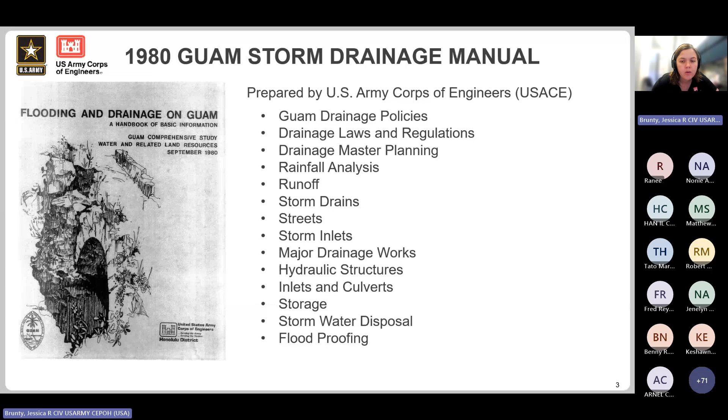The governor of Guam recognized that the 1980 manual was in need of updates based on significant rates of development and advances in technology, rendering better and optimal designs. So in 2005, the CNMI and Guam Stormwater Management Criteria was finalized after public meetings and a comment period. This set of criteria provides a framework for standards pertaining to comprehensive management of stormwater. These criteria provide proposed standards to augment groundwater recharge, achieve water quality protection, prevent accelerated stream channel erosion, reduce flooding threats, and preserve sensitive habitats.

Sticking with the timeline here, around the same time, Dr. Lander from the University of Guam published Technical Report Number 103, Rainfall Climatology for Saipan, Distribution, Return Periods, El Nino. In this report, return period calculations for Guam's peak annual 24-hour rainfall yields a mixed distribution with typhoons.

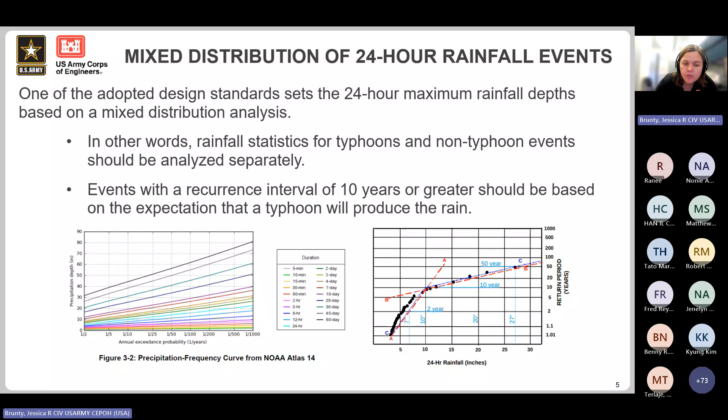Executive Order 2005-35 basically said that DPW should use the new criteria, but at the time, private development didn't have to - they could still use the old standards.

Then in 2006, the CNMI and Guam Stormwater Management Manual was completed, prepared by Horsley Witten Group. This manual was based on the CNMI Division of Environmental Quality and the Guam Environmental Protection Agency identifying the need for a new guidance manual for developing and implementing stormwater and erosion control plans that adequately address non-point source pollution through the use of currently accepted best management practices. So they came up with a new manual.

It was intended to replace previous reference manuals. They also came out with a second volume - Volume 1 provided the general overview, and Volume 2 contained the technical information needed to actually design a landscape. These are reference materials that we also used in the development of the spreadsheet.

Also worth mentioning that in 2010, there was the Island Stormwater Practice Design Specifications. And in 2009, there was another executive order that said application of the criteria was stayed for 2 years.

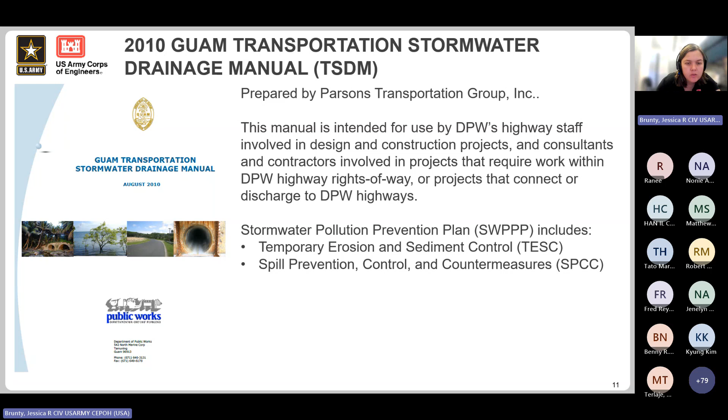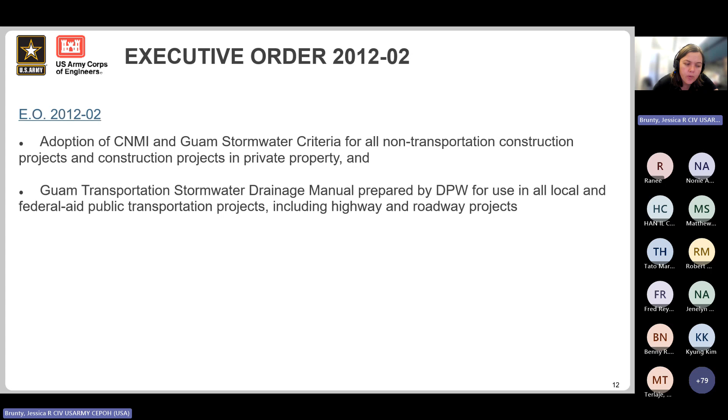They came out with the Transportation Stormwater Drainage Manual in 2010, and this manual was intended for use by DPW's highway staff. So a couple different manuals, different uses, but this latest executive order from 2012 says the CNMI and Guam stormwater criteria for all non-transportation construction projects and construction projects on private property should use these previous standards that were developed, but that all transportation projects would use the transportation manual. So there's a little bit of a difference there, and the spreadsheet was specifically developed for the non-transportation projects.

The president concurred the need for just additional clarity in and updates to the manual. So that's where we're at.

Mostly, I have additional slides on the background as questions come up, but I will kick it to Tyler now so we can jump into the spreadsheet.

Okay, thanks Jessica. I'll give a second in case there's any questions on the background of what we're talking about. And then while we wait, I'll go ahead and share my screen.

So I was going back and forth on how I wanted to do this training. I think the best way is actually sitting here and inputting numbers and talking through each tab. You all should have received a zip folder that had all of these attachments here that you see on the screen.

I'll quickly go over these so you have an idea of what we're all talking about. So this presentation - I actually have it on my side screen - is a really helpful instruction manual that I put together on top of the training. So if you came back and had questions, it really gives a lot of information on how to do this spreadsheet. I'd recommend having it on the side while you watch, just to follow along as we move forward.

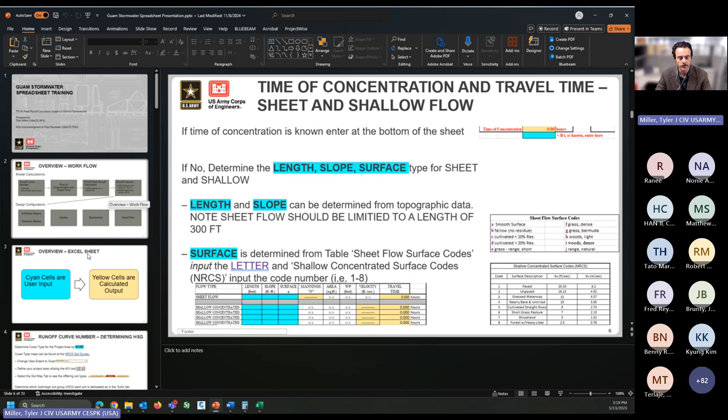And so that's the PowerPoint, and like I said, it's kind of like an instruction manual. The Word doc is an actual example that was taken from the CNMI manual that Jessica just briefed us on. It's examples from projects, and they went through the entirety of the example and inputted everything into this Excel sheet. And that product is this Guam example for part A.

So that is a filled out spreadsheet with all the numbers, and this is heavily in depth - it's like 55 pages long, and it goes really in depth on not only what you're inputting, but also how the outputs are calculated. So if you're super curious on how formulas were made, this is where you go.

Then these are the two manuals that we're basing a lot of things off of, the CNMI volumes 1 and 2, and then there's also the TR55, which is a graphical method we'll use on the third tab. So that's all the things that should have been included as attachments. And from there, I think it's best we just get started and dive right into how the Excel sheet works.

Big overview is you have a ton of tabs down at the bottom. The way the Excel sheet works is you work left to right, starting at the far left and working your way right.

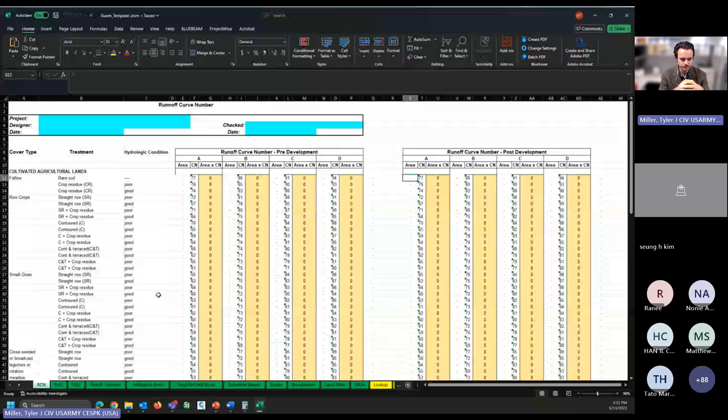Now you have to select what sort of features are planned or you're thinking about for your project. They have an infiltration basin, detention basin, swales, bioretention, and sand filter. Those are the options, and they're all based off of the CNMI manual on how to design them. For background, I'm a designer, so the right side makes more sense to me, and the left side's a little shaky, but nonetheless, we'll figure this out together.

The teal on the Excel sheet is your actual inputs - this is where the Excel sheet is asking for you to put something in. The yellow is already generated output, so you don't have to do anything there. These are things that the formulas in the background are calculating, and if you're curious, you can just click on them and kind of get an understanding, just from general Excel world.

The first thing we're looking at is trying to create the runoff curve number, which is basically how quickly water runs off of the surface. The first thing you have to determine is the cover type of your project area, and this can be done generally by Google Earth or whatnot.

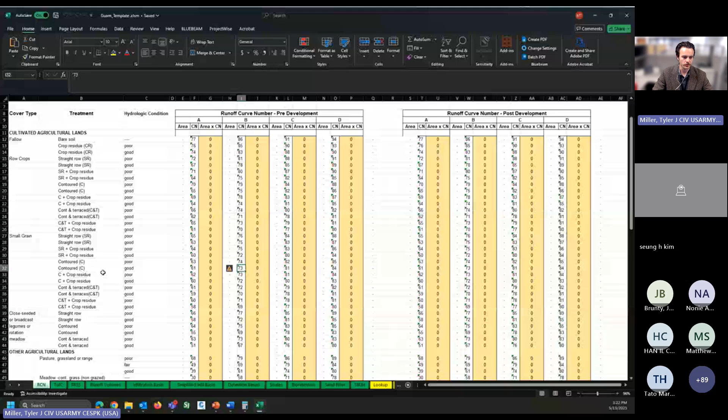For the sake of what we're doing here, we have different cultivated agricultural lands, woods, meadows, fully developed areas, parking lots, residential districts. Something that's super useful is a lot of these, if you hover over them, tell you what's poor versus good. So there's a lot that can be utilized here.

So this is part one, figuring out what your cover types are. Part two is determining which of these columns you're going to be in: A, B, C, and D - this is pre-development and this is post-development. The A, B, C, D is based off of the soils.

At the far right of your Excel sheet, you'll come to the soils tab and you'll see soil name and then the HSG group. The way you figure out what your soil group is, you actually go to this website, the Web Soil Survey from USDA, which, in case you're wondering, the link is within the PowerPoint manual.

What you want to do is when you open up the link, it's going to ask you where you want to go - Guam is an option. Then you can zoom in on a location. For the sake of this, I'm just going to zoom in on a random area.

What this does is you then decide what your area of interest is. For this example, let's say that this is a sort of residential area down here, and let's say that we're going to expand upon it within this woody area. So if we decided that our project is going to take out this wooded area and become residential...

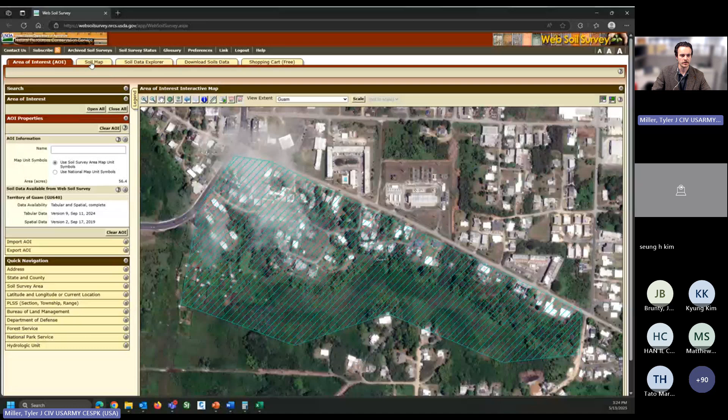It shows you the area you hatched and whatnot. If you go to this tab here at the top left and go to soil map, it will actually tell you the type of soil, the acres, and the percent.

Super helpful. For this example, let's say we're looking for the clay, 7 to 15% slopes - we have 8.6 acres. So what you would do is take this information and find that clay within the soils tab.

I can take that, throw that in my detail. Here it is, 7 to 15%, and it's class D. What you would do with that number then is figure out where that number was. It says it's map symbol 34, which is this area here.

We could probably delineate this as a woody habitat, maybe poor condition because the trees are kind of sparse. So if you were to put this into your runoff curve number with class D, which we found from the soils tab, we go back to that first tab and we'd find, in a sense, for the most part, it's a woods with a grass combination.

It says poor is 30% ground cover with litter, grass, brush; fair is 30 to 70%; good is 70%. For this sake, I'm going to say fair, and then I'm going to make sure I'm in category D.

Okay, so now I can put in, I'm just going to say a random number here for now, but say it was 5 acres. Let's say that our project, we did the soil map. We figured out all of the areas, 5 acres of fair woods.

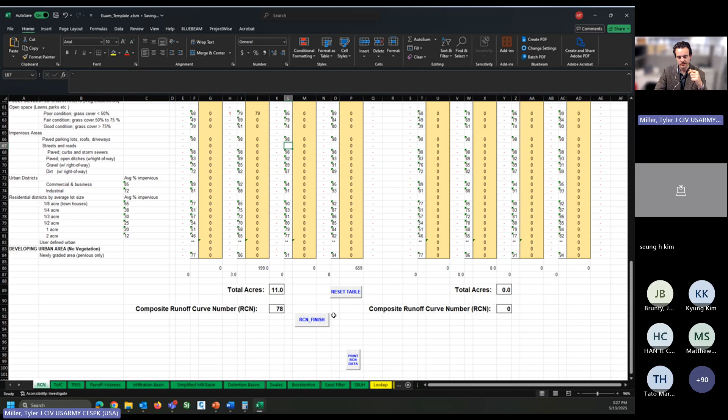One nice thing is that there are these macros built in. So for this sake, if I just want to reset it and clear the data, I can just click reset and it will clear all the data.

I'm going to just, for the sake of teaching, choose a value and put this in and we're going to work through it. So I'm going to say that we have a project that's 5 acres total and it's all pasture land, and we're going to keep that.

3 of those acres are going to stay as pasture land, and I'm going to say that 2 are going to become townhouse, 1/8 of an acre residential area. So 2 of those acres we're going to convert. Let me make sure I put it in the right spot.

So what I just did, just to clarify, on this left side, this is pre-development, this is before you've done anything. And then we have our right side, which is post-development. So now I'm saying that there are 3 acres that are still meadow, but then 2 of those have become residential.

One cool thing as well is that it tells you the average percent impervious, which we'll need later, so this is also super useful. But if we scroll down to our bottom, the big thing is to make sure that our total acres equal up, that your pre and post should be the same. And then you have your 2 numbers of 80 and 85. I will pause here, this is a very heavily loaded first sheet with a lot of information.

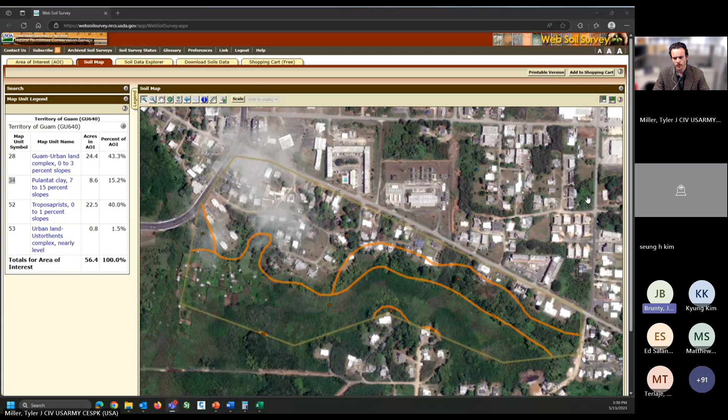Oh, that might have just been me. Did I change it to C on accident? Oh, good catch, that was a great catch, yeah that's a good call. If you're in an area and just because your cover type changed, your soil type didn't, right? So that should stay D because your soil's not changing, but your cover type's changing. Okay, so thank you for that catch.

And then I see another hand up. Ken? Yeah, thank you. Good one. This is really good stuff.

Thanks for this. This is Ken from DCA. Ed's question is a good one. I think those layers on the GIS map that was shown came out of an old reference from when the soils were mapped, and the image is probably updated regularly by USDA. But that base layer of the soils is an old layer that just needs to be visually verified out there to make sure there was no significant major change. So I think a site visit for larger sites is the right way to go, or at least some sort of updated check.

Yeah, thank you. Okay, I'll keep moving on.

Like I said, this sheet is very heavy, right? And we just did a really quick thing. But if you're one of the designers, this could take some time, jumping back and forth between soils and land cover trying to get that connection between the two.

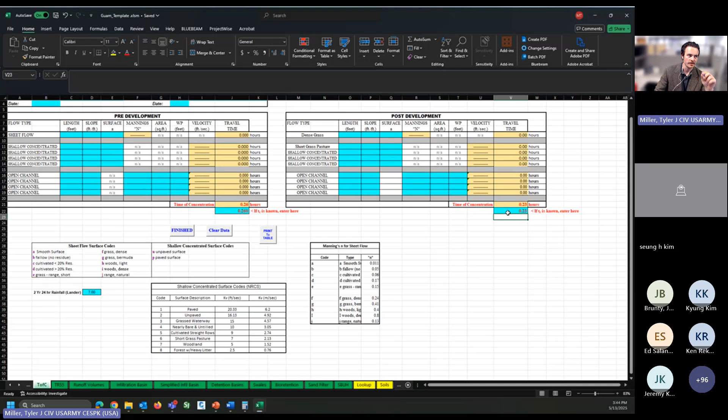Okay, so keep moving on. I'm putting in right now, just for the sake of having numbers to populate the sheet as we move forward, the numbers that they provide in example 4 part A that was included. So in case you're curious where I just type these in, I'm just typing them in to have numbers to populate outputs later on.

Oh, and then the last little piece is there's a 2-year 24-hour rainfall value here. This is based off that Lander report that Jessica had talked about previously, where it's trying to account for monsoons and rainfall data instead of just using NOAA Atlas.

And so you'll see in a couple of spots that rainfall's already populated for you, even though it's teal. That's because most of it's from Lander, TR55, or CNMI. But for the most part, you shouldn't touch these unless otherwise directed.

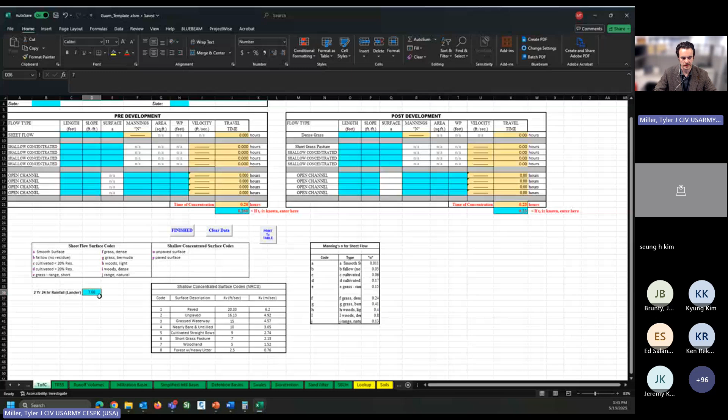Okay, so moving on, the first thing you'll see in the TR55, which is the peak runoff calc, is the drainage area and the runoff curve numbers, and they're yellow. This is because they grabbed them from that first sheet we did - those final summaries we saw at the very end.

This, for the most part, should be a pretty straightforward sheet because there's a lot going on in the background. The only thing you really need to focus on is the location adjustment factor, which I'm going to quickly show in the PowerPoint because it gives you the figure you're supposed to refer to.

Okay, so once again, this is pretty straightforward. You just have to know where your project's at.

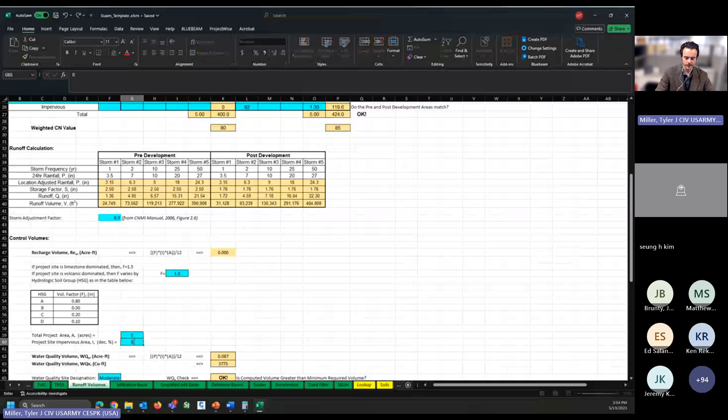I'll stop there for a second because I know I just went through a lot. Is there any questions at this point on runoff volume? The last thing is water quality. No questions in the chat.

Last thing is water quality site designation. The Excel sheet does pretty good at already giving you that designation based off your region and your water quality region. But there are some instances where moderate isn't a good call. Sometimes there are hotspot locations, found within table 2.1 for hotspot. So this is like industrial sites, marinas, public works storage areas. There's a whole classification on what would be determined as a hotspot. So there's high and hotspot and then moderate. But since where we were looking there was nothing really out of the ordinary, I'm just going to choose my water quality site designation to be the same as what the Excel sheet generated for me.

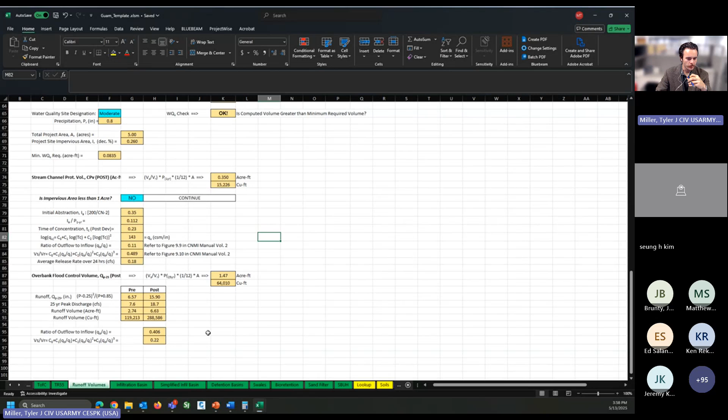So gorgeous, okay. At this point we've pretty much completed the pre-design information. We now have numbers from these 4 different tabs that are going to be incorporated into your design choices: your infiltration basin, your detention basin, your swales, your bioretention, and your sand filter.

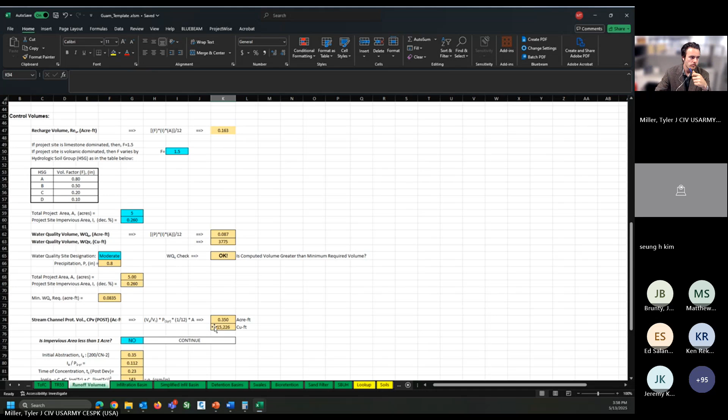Also, you can just put in the weighted CN value here if you'd like. But you want to make sure you put in your area of your impervious still, because it's important for later on factors. So usually best practice is just to refill out the table to make sure everything's working correctly. Once again, I'm just filling out the numbers to be the same as last time.

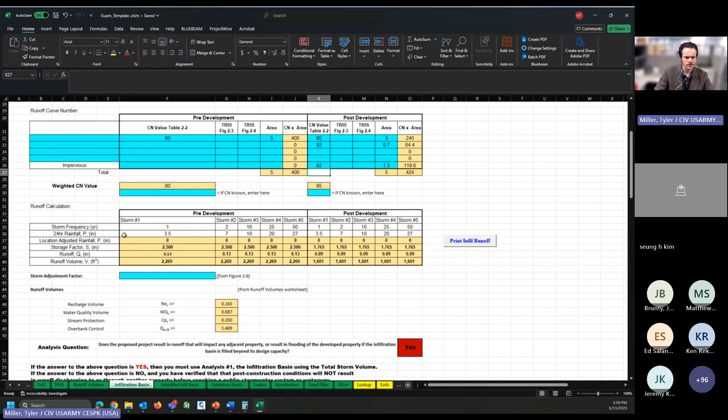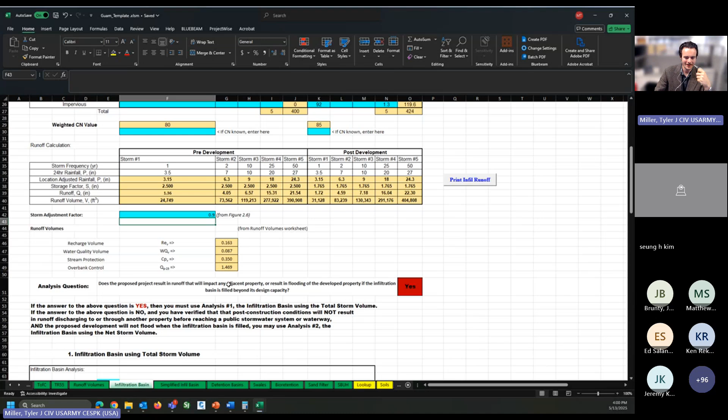Now what it's doing is it's doing the runoff calculation, which I believe is the same table as what we've just seen. Our storm adjustment factor was 0.9, that was from that first figure I showed, the blue figure. It's going to come again and again - 0.9.

And then here's this question that I had just talked about, the QP25 number, that they're not required. This pretty much tells you what you need to ask yourself. It says, does the proposed project result in runoff that will impact any adjacent properties, or result in flooding of the developed property if the infiltration basin is filled beyond its design capacity? Then your yes and no basically are going to influence which of these 2 tables you're going to use - either infiltration basin using total storm, or infiltration basin using net storm.

It tells you which one to use. It says if yes, use analysis 1. If no, result in runoff discharging to or through another property before reaching a public stormwater, and the proposed development will not flood, then you may use analysis 2. So analysis 1 is the more stringent, and analysis 2 is the less stringent. This blip here about when you can say no is what I mentioned earlier about the QP25 value.

If you're following along with the PowerPoint, you'll notice on the infiltration basin sheet, which I'll show here, it actually gives criteria based off the CNMI manual for whether or not you should even use the infiltration basin, which is super helpful for design. So it tells you the status, whether it's okay or not.

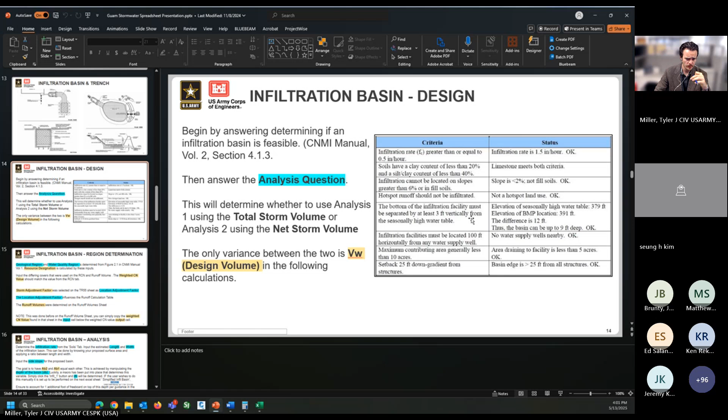So we said yes for this assumption, and so we're going to be here within analysis 1. The first thing it's going to ask about is infiltration rate. You determine infiltration rate from your soils tab here to the right.

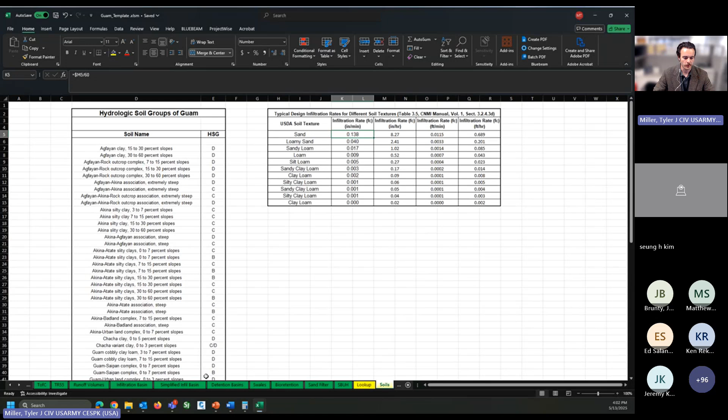So for this, I'm going to just decide for fun which one. I'm going to go ahead and say sand at 0.138. I'm going to say we have a pretty good site for infiltration. It's real sandy, the water's able to infiltrate into, let's say there's an aquifer or whatnot. It's real easy, so let's go ahead and go with that.

I go ahead and put in that number that I just determined. And once again, the infiltration rate is based off the soil of the area you plan on making an infiltration basin. It's not necessarily like a predominant soil group based off the soil maps, it's based on the soil group of where you want to put this thing.

And then from there, this is where you can put an estimate of what you think your length and width of your basin is going to be. This could be, you know, you have a preliminary site design and you decided you can fit approximately a 100-foot long basin and a 100-foot wide basin.

Now what you're going to say is your Z, which is your side slope. So Z is your horizontal, and then it's assumed a 1 vertical. So for this case, if we say a 2-to-1...

What it now needs to do is it has this function here, infill 2, that will basically go through these calculations, computed with a lot of pretty cool tech, that will then determine how deep your infiltration basin should be based off the design volume that we talked about earlier, based off of the precipitation. So all these different numbers are coming from the tabs we had worked on before.

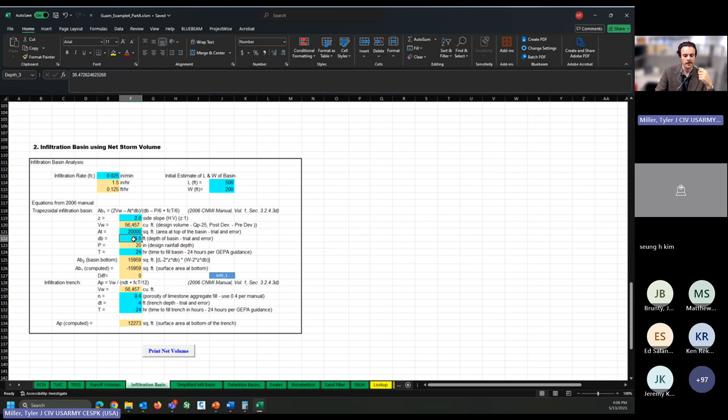If you have one that's functioning, which this is from Guam example part A, which has all the numbers, let's say we change some numbers around and the AB2 and AB1's are moving around. What you can do is go ahead and click this, and it determines the depth by the trial and error number. So to show that again, say you change your width to 200 and your side slope to 2-to-1. Focus on this number here is 18.8. If you click this, now all of a sudden the depth of your basin has to be 38.5.

That makes sense, you've reduced your area pretty much. Your functional capacity of your area, so now it needs to be deeper in order to still withstand the design volume. So if we increased our area at the top of the basin to 50,000, this should... there you go, the depth changes. So this is a pretty neat tool to help you determine the depth of your basin and whatnot.

Excuse me, this is Ed. I wanted to clarify the values of the length and the width. Is that the top or the bottom of the basin?

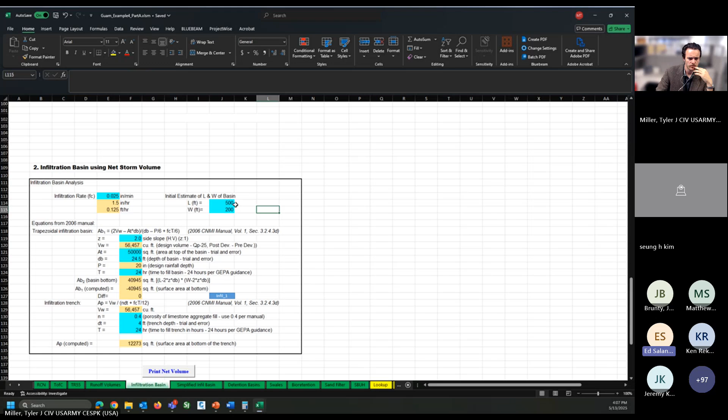I believe it's the top. I'm pretty sure it's the top of the basin. Yeah, okay.

There's also a question in the chat if you could do a site-specific infiltration test and use that instead. I guess if I were to respond, in the spreadsheet that would work. You could just put the number in, but we'd have to circle back with maybe Guam EPA if they would accept that. Right.

I'm just making a quick note on probably putting a note here on Tyler's side to say that.

This is Mike. Just call your break whenever you think you need it. I think we're ending at 11, if I'm correct. So whenever you feel you need to take that break, we can take a short one, whenever is a good part in your thing. I think now's probably a good time.

Thanks for calling that out. This is a good spot probably to stop. I probably should have stopped once we finished out the pre-design and moved on to the design issue.

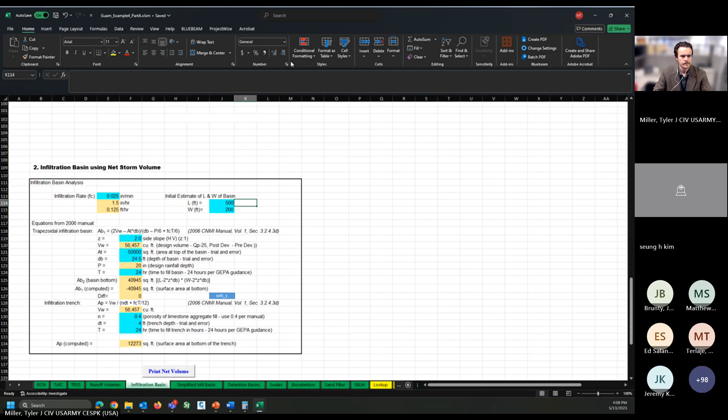I have one more question. Earlier you flashed the classifications of stormwater hotspot land uses. Are those the same as what was outlined in the CNMI Guam Drainage Manual?

Are they the same? Yeah, I can actually check. Let me pull up the manual and we can make sure that's still the case. I might have too many tabs open at this point.

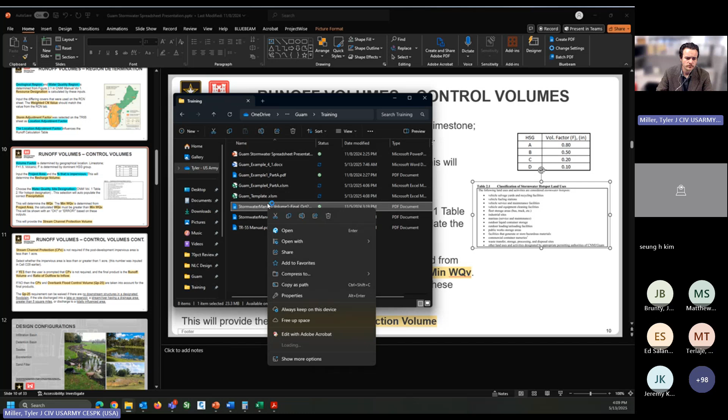Okay, so based off the PowerPoint, it's in volume 1, table 2.1... table 2.3. There it is.

So this is designation of stormwater hotspot land use, section 2.1.1.1. Your table here gives different land uses that are determined as hotspots.

Once again, I think this is really important to show how the Excel sheet's a tool that's completely based off of a lot of these standards and whatnot. So if there are times where you have questions or you're confused, there's definitely resources to try to find it. This is kind of like the specifications of the contract in a way, and the Excel sheet's almost like the drawings or the plan set. It just shows the design, it doesn't necessarily go into the nitty gritty as to how you came up with the design, if that makes sense.

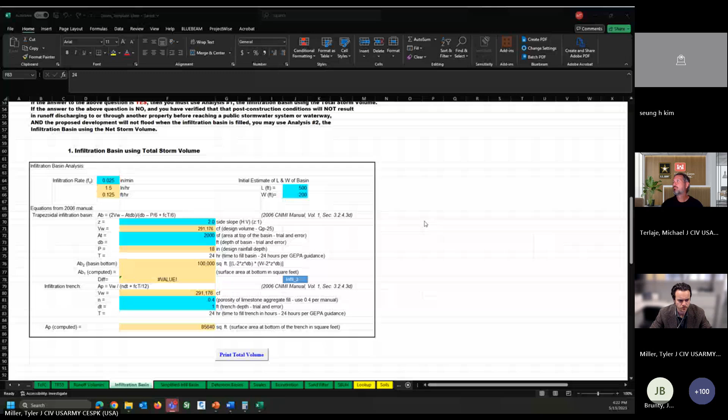One thing I wanted to also talk about was the required versus optional stuff. So I'm going to go through every single tab, but that doesn't necessarily mean that every single project needs an infiltration basin or a detention basin or a swale. That's determined by the designer and site constraints and all that sort of fun stuff. You may be at a site location where an infiltration basin is not feasible. And that's what all these tabs are beyond runoff volume: they're based off what you think your 10%, 30% design is, right?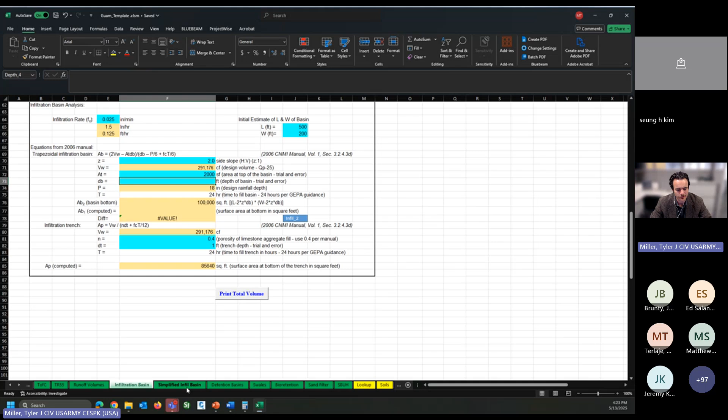One thing I was thinking about is the depth of the basin trial and error work, if the macro for whatever reason isn't working—it's not been working for this class, which is strange because it was just working. If for whatever reason it can't get fixed, there is this simplified infiltration basin which actually allows you to do what the macro does, but by trial and error. So I guess really quickly I can show what that does. If I put in some numbers, do I need to re-put in? Of course I need to re-put in these numbers.

I just wanted to show what this can do if you wanted to, instead of letting the macro determine it, affect the numbers manually.

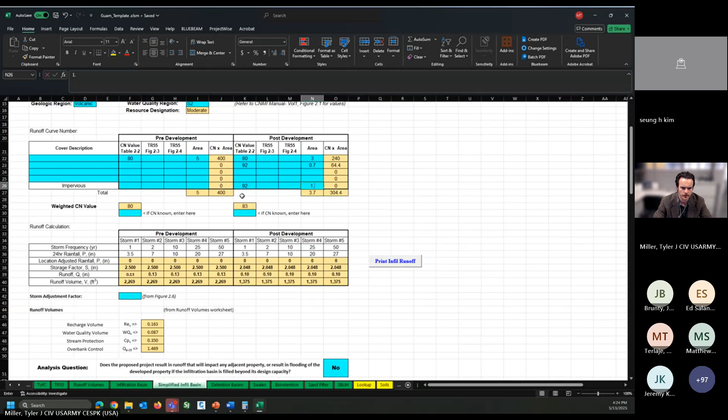Said this was 0.9, okay. We said yes earlier. And then area at the top of the basin, let's just say it's 500. Let's say we want it to be 5.

So what this does is it calculates, we said 5, and what this does is it calculates this AB number, 72,000 surface area bottom in square feet. What this is going to try to do is get this infiltrate this size error, the V infill minus VW.

So if we went ahead and said 2-to-1, oh, this also helped answer that question earlier. Oh, never mind, there's bottom as well. I was curious if it was going to say top versus bottom, like we had that discussion earlier, which we'll have to put in a note later.

So what this says here, this bottom number, it says size error, and then it says make this positive and as close to 0 as possible. What it will do is check, and if it's not near there, it's going to say error. So if we need to get this close to 0 as possible, we can start changing these numbers to get it as close to 0 as possible.

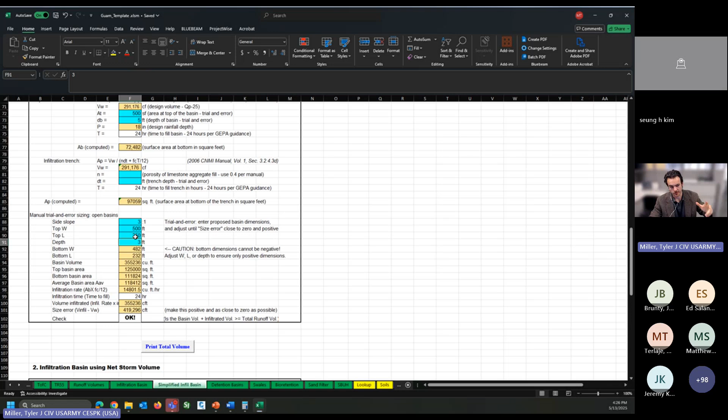So say you're confined to a top width of 500 and a top length of 250, like you have determined by either looking at maps or whatnot, or you have a preliminary site area and you set aside an area to be your basin, and you said, okay, the very top of it can only be 250 long, 500 wide. There's nothing I can do about that.

You can then say, all right, let's see what a 2-to-1 is going to do, and you're going to see a size way too high. Then you can say, okay, well, let's keep it at 2-to-1, but maybe let's make it 5 feet deep, right? And okay, now it's getting even bigger.

So then you know, okay, well, it's pretty much just like you kind of sit here and change the numbers until they get close to where you're trying to get. So it looks like these two widths just aren't going to work. But long story short, that's what this simplified infiltration is, taking away the macro and doing it manually.

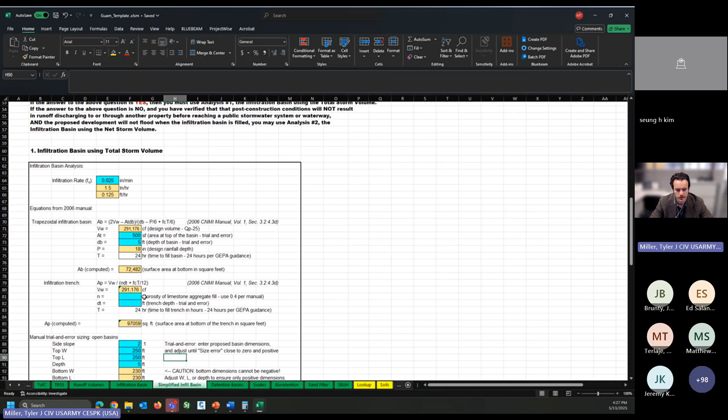I wouldn't recommend doing that, just because it can get funky sometimes, and all the examples I've seen always use the macro. And the Excel sheets you've been provided don't have that bug like mine does. I think it's just from so many runs of doing numbers that technically aren't making sense, but I'm doing it for the sake of understanding, and it bugged it.

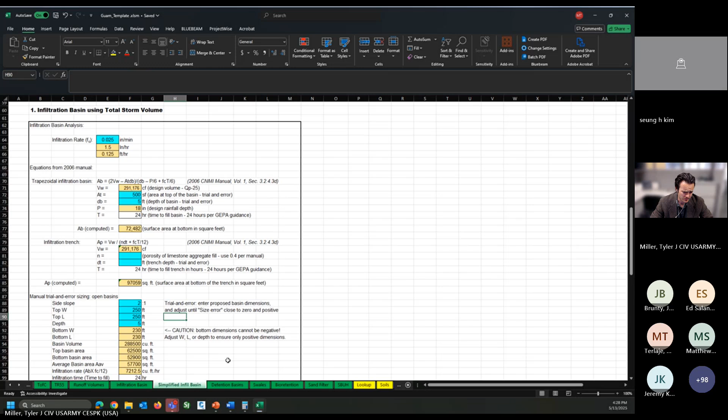So that's infiltration basins. That's the first of the different design configurations in a nutshell.

Okay, and then moving on to detention basins, I think this is probably one of the most in-depth tabs. So this one may take a bit of time to go through, and I'll do my best not to bug out the program again.

So the basin starts with the drainage area, which is determined from the total project area, so 5 acres, right? That's what we had said earlier.

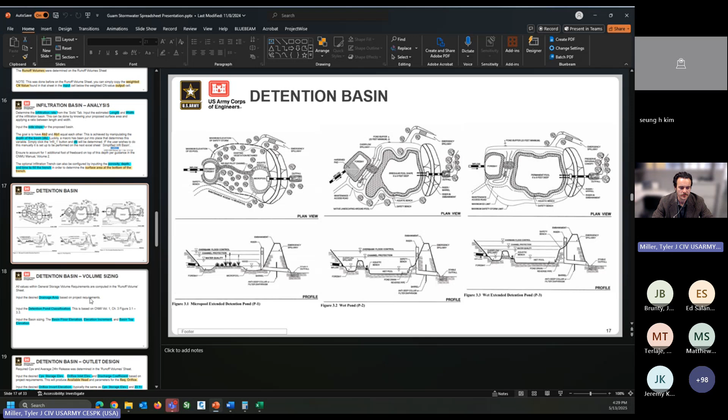And then there's a detention pond classification choice, which I believe is right here. So on the Excel sheet, there's a P1, P2, and P3 where it tells you wet pond, micro pool, and wet extended detention. This is found in Chapter 3, Figure 3.1, Figure 3.3, and it goes into depth about what these different pond classifications are. So these are different design choices that you use when determining it.

So for this example, I'm just going to select P2 for the sake of this.

I want to understand why this is showing up as negative—recharge volume, runoff volume. Sometimes numbers don't add up correctly and they result in negative numbers, just from the example. It's a good check when you're doing your design to see why some numbers may be negative, because maybe you put in numbers incorrectly, or it's just not sounding out logically with the formulas. I can't imagine it's going to be good, but we'll see.

We'll keep moving forward. The next thing it's going to look at is we're basically going to slice this like a cake of your detention pond. What we're going to do is take the basin floor—this is true elevation, not just relative, this is absolute elevation. Example 4, part A has it at 381.

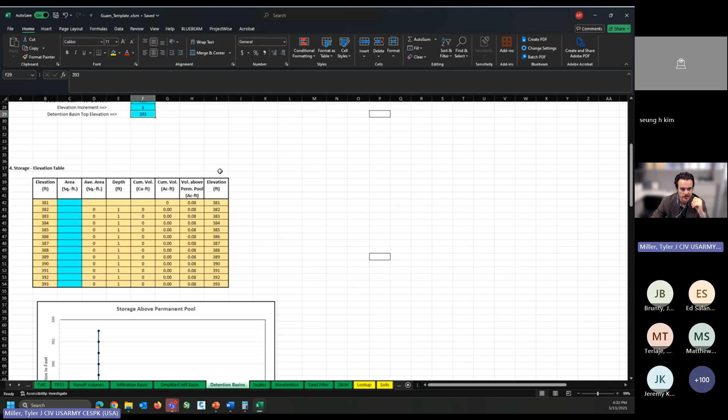We did 1, so it's going to do it in increments of 1, and it shows beyond your elevations. But when you put in your square area, you don't want to put in anything beyond 393, because after that your basin's no longer available. So if you do 1, the designer or CAD tech doing the design needs to measure the square foot area of each contour line—your 381 line, your 382 line, your 383 line, and so on.

I'm going to input the numbers found from the example to make sure it shows a relatively typical flood volume basin, where as you increase in elevation, your capacity increases.

Once again, these numbers are just coming straight from example 4, and it's just to give a visual of what's going on here.

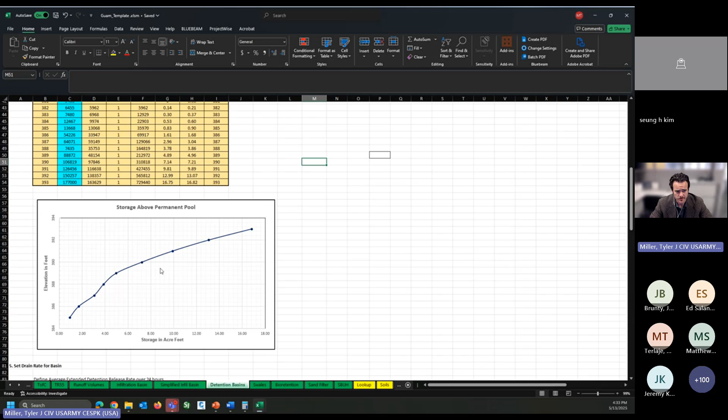Once you filled out these values, it auto creates this graph for you. It tells you your storage above permanent pool, your elevation on the left of your basin, and your storage in acre feet on your x-axis. They're also found here, cumulative volume above permanent pool.

We're going to use this later on because when we're designing a basin with an orifice or an emergency spillway, we're going to want to locate those at certain flood volumes—maybe the 25-year, the 50-year, or whatnot. This is where I talked about way back in the beginning that we're going to come back to this graph in TR55 to find those volumes in those ratios.

So it's going to go down to the drain rate. The CPV value was determined from runoff, and then the average release rate is a formula that takes the CPV value. And then now what it's looking for is for you to determine your outlet.

This is like trial and error, similar to the infiltration basin. I think the idea is that you sit there and come up with a design that fits your site. You might think, okay, let me put my orifice halfway up the basin because there's a natural ditch nearby that I can connect it to, and the invert and where it discharges just naturally works, and you may do this sort of stuff.

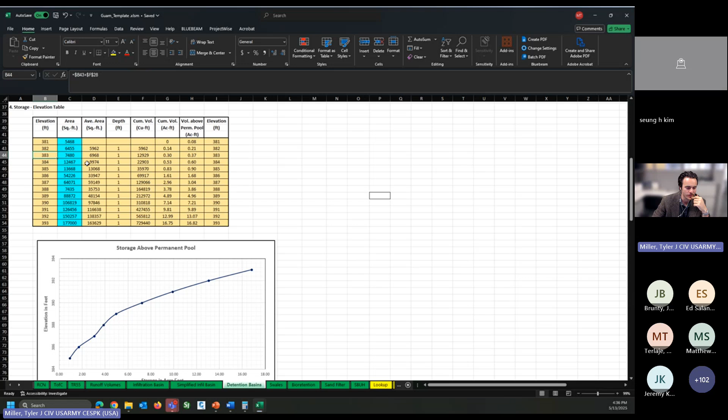In this case, I'm going to just look at it graphically, or I changed my mind, I'm going to look at it via the table, and I can see that it's somewhere between 383 and 384. So if I had to guess, it's around 383.5 or 383.4, and you can go ahead and just put that in there.

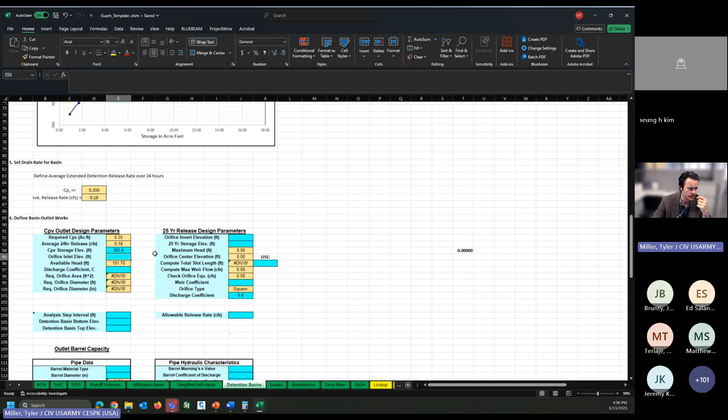And then this is where the designer is pretty much able to choose where to put the orifice. Since this thing goes up pretty tall, I'm just going to put 388, just about halfway up the way. And of course, okay, so it's not working because the CPV storage volume is below it. So for the sake of practice, we're going to go ahead and just say that this is at 390, that it's higher.

And then discharge coefficient is typically 0.6. That's found throughout the CNMI, the Guam manual. And then what this is basically going to do for you is then it calculates your orifice diameter, both in feet and in inches, and then your required area. It does that after you put in these three values.

The 25-year release design is based off the orifice inlet elevation that you put in earlier, and then your 25-year storage elevation, which is, if we look at our 25-year, we have a runoff volume of 6.63. So probably around 389, 6.63, somewhere around here. Looking at like 389 point maybe 7.

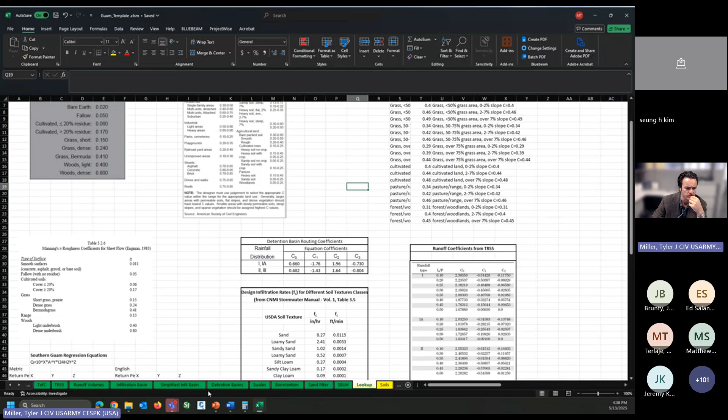The weir coefficient from the example is 3.1. I have to figure out where that weir coefficient comes from again. I think it's based off the example of 4. It may be within. I wrote a mental note to make sure that what I'll likely do is just put a little note here that says where these come from to get the weir coefficient.

And then this will, oh, also there's a computed total slot length. If you don't like the number it gives, which here is a negative number, say you've already designed this and you want your slot length to be 2, it'll do it naturally itself, and it'll tell you the computed max weir flow that it can handle, which is 13.74.

If that's the max flow, let's say that our allowable in this case is right next to it, 13, right? That actually changes the value, it looks like. Okay, yeah, so it changes the computed slot length now. So this is kind of useful. So let's say in your design, you've decided you want it to be 20, then we can change this to make sure that it equates to this, and that the cubic feet from the orifice and the max.

This is basically saying that the max that the orifice can handle is 21, and that the max weir flow is 19. So this is basically saying, okay, if you did an allowable release rate of 20, you're good, you're under that max. Check orifice equation.

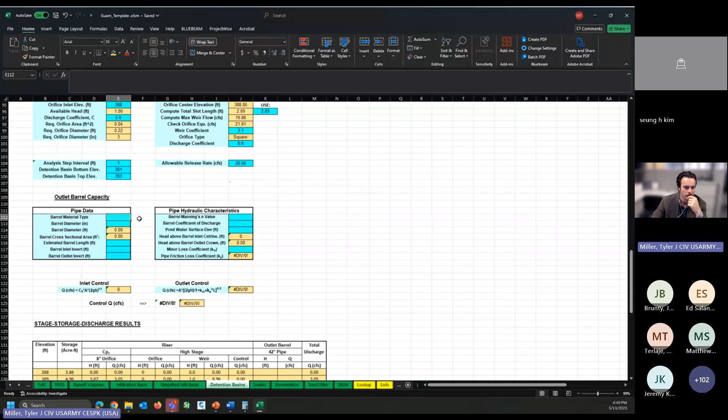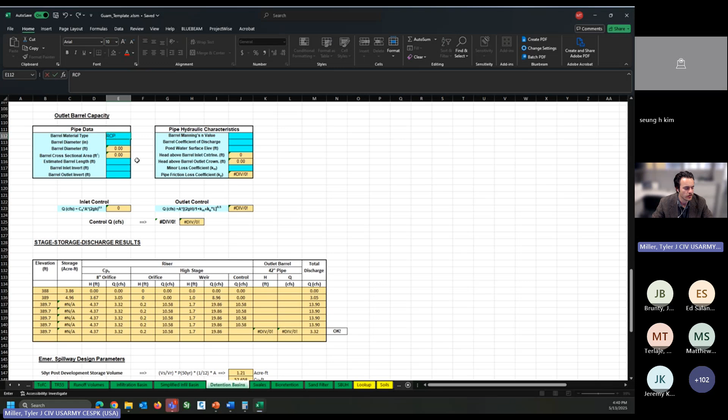Then this is once again just the same numbers as above. These are outlet barrel capacities. These are once again an optional choice that you can make, or if you have a barrel beyond this. For the sake of putting in, I'm just going to copy what example 4 does, which is a reinforced concrete pipe. It has a 42-inch, and then the estimated length was 70, and then the invert's at 380, and the outlet invert is 379.

And then the barrel's mannings, that's just based off the concrete. Coefficient discharge is 0.6, like it's been found throughout the manual, is 0.6. And then the minor loss coefficient is also based off the type of material. And then what this does is it calculates all this to figure out your total discharge, like how much it would take a long time. And then what it basically tells you is what your emergency spillway, all this information is telling you what all your different flow rates are going to equate to and whatnot.

And then you go here to your last piece, which is like the emergency spillway choice. If we did, say rectangular, we put it towards the top of the spillway, and we say it's about 20. It'll have a max discharge of 188, which is well above what we saw earlier. With all the different configurations, we have a total discharge of 3.32, so we're good, we're fine. Or sorry, we have an outlet barrel with 140 and whatnot, and then the 50-year discharge, which is right here, pre and post, is 26.

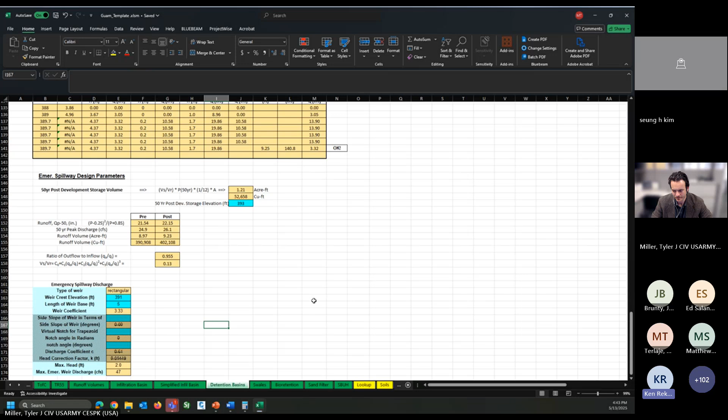Of all the options when we're on Guam, this is one that's kind of rarely used actually. But it's good that you're going through it, and I think there's a lot of hydraulic principles at play here to bring it all together. So it's really not that easy to go through without a good background of those principles. I just wanted to acknowledge that, at least from the ones that I've done, we rarely use this approach, but I think it's a good tool and it should be considered a little bit more.

And the reason why I think we don't use it as much, particularly outside the fence line, is discharging—having those orifices to discharge. A lot of times there's no infrastructure to discharge to, so it makes it kind of a challenge. Maybe in your experience, can you speak a little to that? Maybe if you have an area where your existing flow path goes, this probably could work okay. But if you're right next to your neighbor and you have a point discharge, sometimes it can raise a red flag.

But I think this is very, very useful. We should be using it a lot more. It's just that applying it out here, particularly in some areas where there's no mature system, is challenging. Thank you—I think that's a really great point.

I think that goes to show the geographic differences, right? Here in California, I find it's a little bit easier to find those places to discharge into. I don't think we're as valued on land. A lot of the area, especially working in the federal realm, a lot of times we're working near waterways already, just as the Army Corps does.

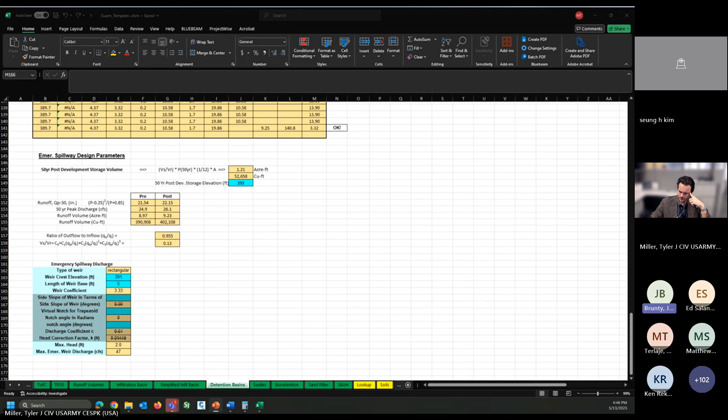And Tyler, there's a question in the chat from Seth Colburn about the soils tab—how some of them have multiple hydrologic soil groups, and how can you tell which one to use?

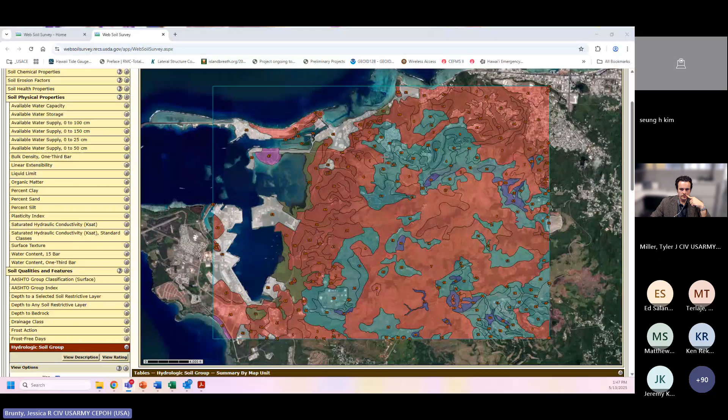If you don't mind, I'm going to steal the screen just to answer that question. So specifically, the question was on this one, the Togcha-Akina, which can be different—well, not in this area of interest that I've drawn, but in the spreadsheet it could be either B or C. And if you're not sure, a safer bet is likely to pick the less permeable one, the higher letter—C or D versus A or B. That would be a safe bet.

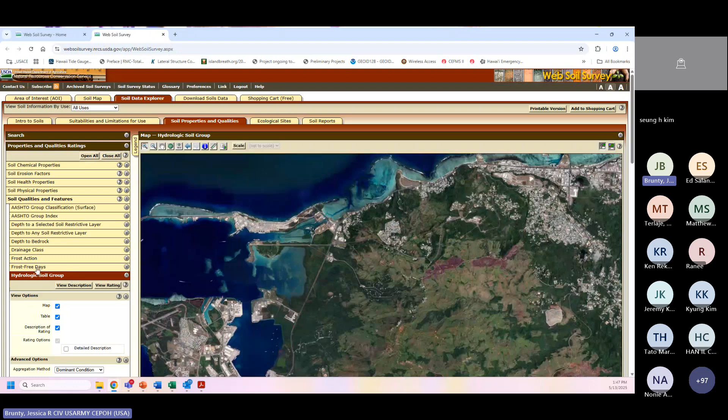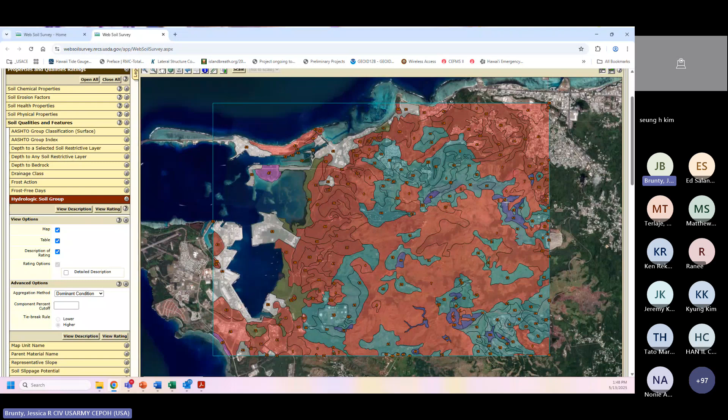But if you really want to know, you could also go into the web soil survey, draw your area of interest, go to the soil data explorer, and through the soil properties, you could view the rating. So even though it's showing here different, it would give you specifically what the group rating is for that area. But if that's getting to be too much, you could conservatively just pick the higher, less permeable one.

And that's it. I'll also put that, summarize that in the chat as a response.

That's super helpful. I think that tab's honestly probably better to use than the original soil map, instead the soil explorer that already just delineates it for you, takes a step away where you don't have to use the soil tab on the Excel sheet. But either way gets you there at the end of the day, right? So thanks for that.

All right. So yeah, as we keep going through these tabs, they get a little bit funkier as you keep moving on, because now I'm trying to show values of a design that hasn't really been thought through, and this is where going through example 4 is super helpful, because it basically creates the project for you to then walk through and see the values they use, where the values actually make sense, and it's not just me randomly putting numbers in and the system getting mad at me.

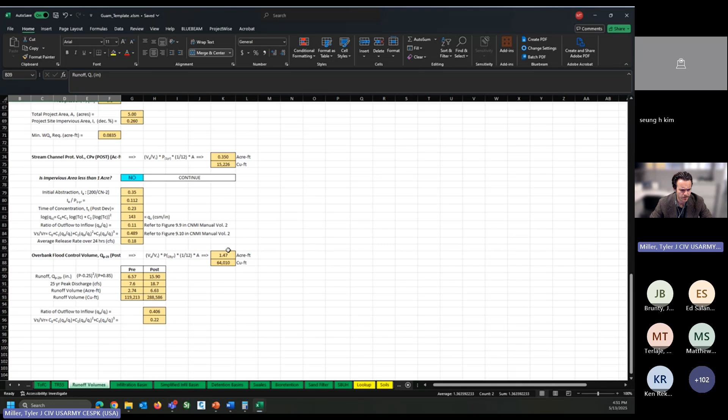So if we go to Q1 and Q2, runoff is right here. And then it's asking for Q1 and Q2. Let me make sure I'm in the right spot. Yeah, so it's just these two values, Q1 and Q2, storm frequency year 1 and 2 right here. And then you would just use runoff 1.72 and 4.59. So I'm going to go ahead and put those numbers in, 1.72 and 4.59.

And then, yeah, this was done back in the beginning. These are pre-populated based off your curve numbers and whatnot.

Okay, and then I already filled out these numbers. These are not definites like you have to do. These are recommendations based off the Guam manual. This is from figure 3.13, and it goes through the recommendations.

There is a max depth requirement for swales of 18 inches, and that's where the 0.75 comes from. But the majority, because it's based off the average height of the maximum, yeah, it's based off that information.

So these don't have to stay, but I left them as is because they're all the recommended design configurations for a swale. And then what that does is gives you the required dry swale size area.

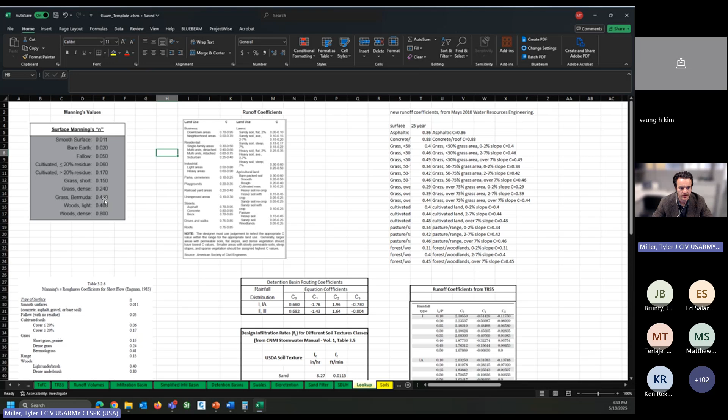So if we do grass Bermuda 0.4, that's what I'm going to base it off of. You can do this at a location, since usually grassy swales are pretty typical, pretty standard. Okay, and then the next thing it's going to do is check to make sure that the available slope you determined is good. The typical best practice is 1 to 4%. This calculated it to be 2, so we're good to go.

The volume, top width, and bottom width are calculated here.

One of the things the Excel sheet does is capture, based off the configurations you gave, whether you have a big enough bottom width of 2 feet, which is the minimum, and it highlights it red if you didn't. Then it basically says, okay, I'm going to go with the 2, which is what it's doing right here. If the bottom width is less than 2, it's just going to use 2. Kind of nice.

This swale sheet is helpful because you just put in the numbers, and it auto-populates a lot of things itself.

Interesting thing is if your slope is greater than 2, it puts in check dams automatically for you, and it tells you how often and how many would be required.

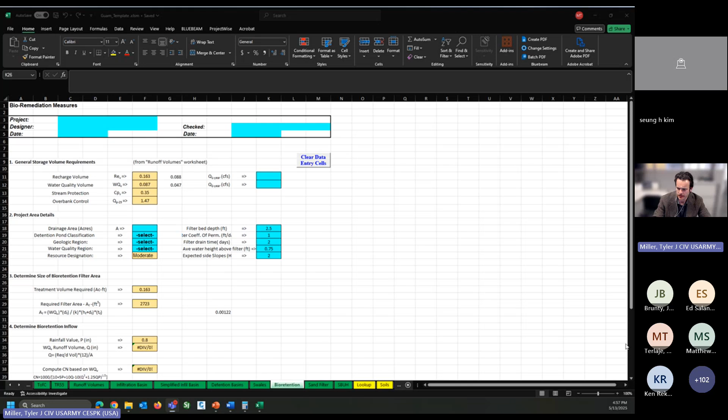Bioretention is going to look pretty similar to the swale section. I think it's also important—let me quickly show this, because when I was first doing this development, bioretention was a little foreign to me. I thought it'd help to show the Guam manual that shows bioretention and whatnot. I don't know if Guam does as much of this bioretention design work as I've seen in California, but once I saw this picture, it really clicked for me.

I've seen a lot more of this practice happening in my town here in Sacramento, where instead of just having a gutter near the walkways, they put a little riparian wetland area to allow for natural filtration. So I don't know, have people seen this sort of practice done in Guam, or is this a foreign thing? I'm just asking the group in general if people have seen this before.

Go ahead, Ken. Yeah, I've actually never really done this particular one. We've done a little bit of a modification on the swale side, where we do kind of a wet swale, but I've never really done it where it's intentionally bioretention. I see the concept, but I still struggle with it. I've done something similar for a wet swale, but really I was just trying to do a dry swale—that's really what I was trying to do. So I agree, at least for me. I'm sure others might have. I think I have seen it—there are some parking lots where I think there are some designs that have taken a stab at this and used it pretty well, but I haven't.

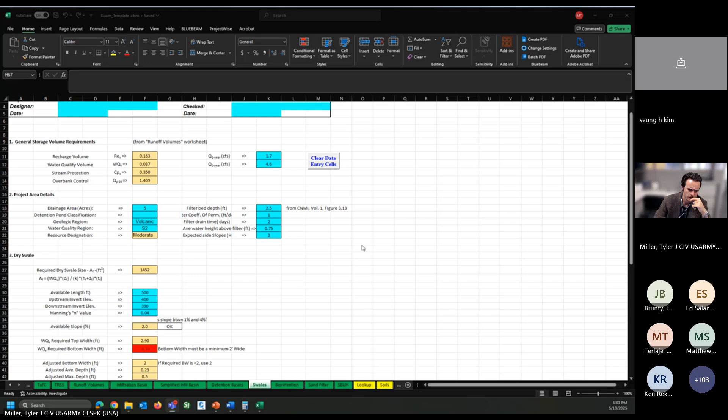Oh, go ahead. And Tyler, there's a question on how would the calcs differ if there were any bends? Was that Seth? Was that question on swales or bioretention? Swales. Oh, sorry, that was for the swales.

Yeah, I don't think the bends would affect it that much. From what I've seen, I think they don't make that much of a difference. I could see where Seth is going with that, and I think where you capture that is your length, right?

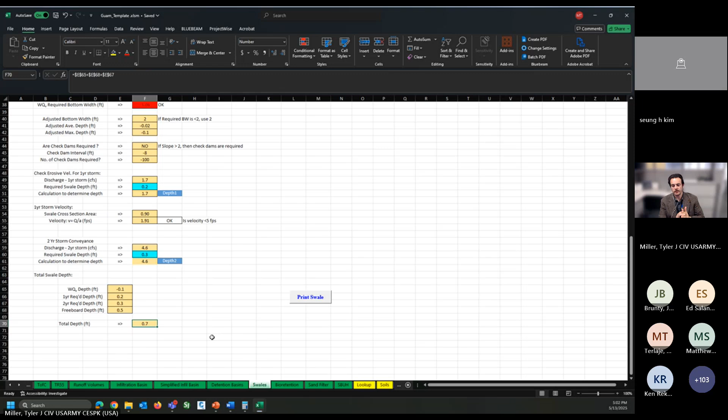So instead of just doing a straight shot from 400 to 390 over 500 feet, if all of a sudden, let's say this depth isn't practical, if you were to make it sinusoidal, that's technically increasing your available length. Instead of this being at 500 feet, now all of a sudden it's at 750, because you're measuring the length of the alignment, not necessarily the straight line from 400 to 390 on the contour. So now I've increased it to 750, and that brings down my depth to 0.7. So it may work out to where, for whatever reason, you do want more length, and that's how you capture it via the available length here.

Alright, bioretention. So this, from what I understood, is maybe more of a niche thing, and I did notice there wasn't much of it shown in the examples. So this is starting to make a little more sense why it wasn't shown. But let's just go ahead and do it anyways.

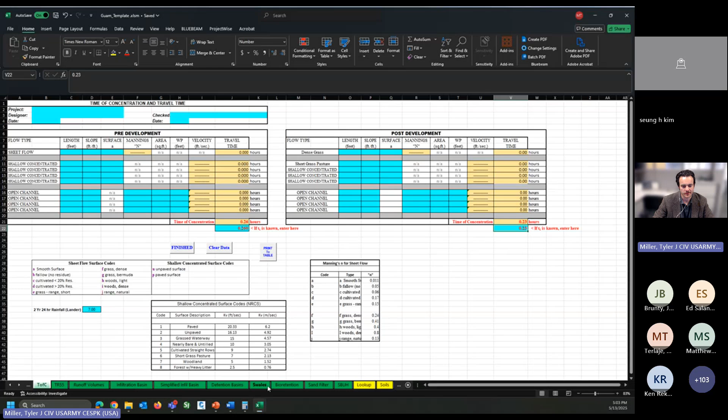So once again, these are those numbers we talked about that are kind of just standard practice, 1.7, 4.6, so it follows the same mantras. The last thing you have to put in is time of concentration, it gives you the time of concentration you calculated way back, post development, 0.23. It puts it off to the side for you, and you can just go with that one. Then it gives you your required filter area, volume, peak volume, abstraction ratio. So it's a little underdeveloped, but it does give you some valuable info, I think the biggest one being the required filter area, probably one of the biggest values for this section.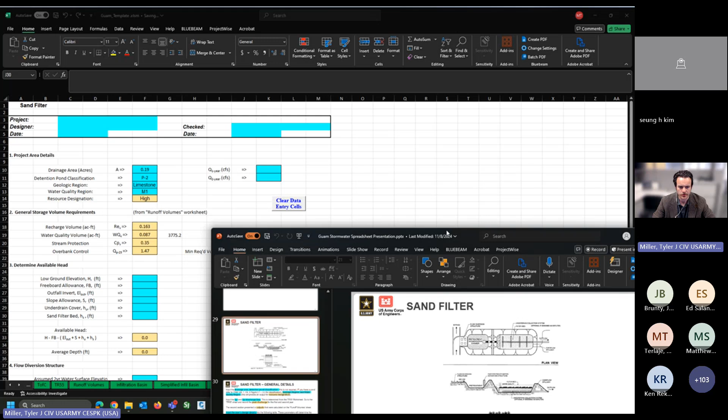And then lastly is sand filter. I think sand filter and bioretention are pretty close to the same, but here's a figure from the Guam manual, figure 3.18, that shows this design configuration, to give an idea of what the sand filter is doing. It's really similar, in my opinion, to the bioretention, but it's trying to get filtration via sand instead of vegetation. That's why you have this really large piece of the cross section that's just clean washed concrete sand, and then some sort of perforated underdrain.

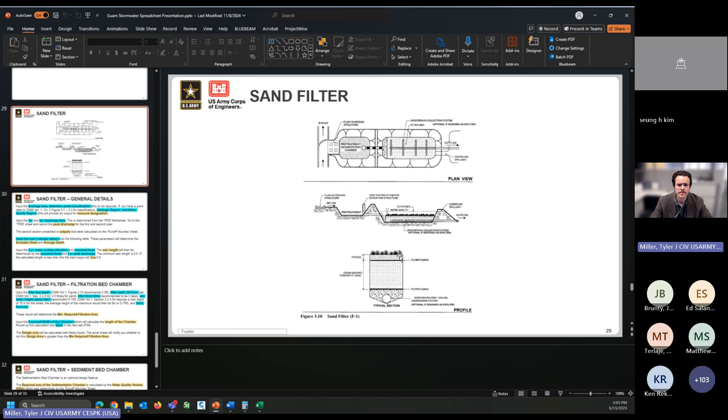And then once again, this is very similar to the other two, where you have your 1.7 and 4.6, your two values. And then this is where I'm going to admit my shortcomings. I haven't done a sand filter design, so these numbers here are a little outside of my expertise, and it's kind of hard for me to know these values. But I'm assuming, long story short, you fill these values out, and then it's going to give you your average depth that it assumes your sand filter to be at, and then you can determine what additional features you have via these different tabs.

So there's a flow diversion structure, if you have a filtration bed chamber, if you have a sediment bed chamber, and then at the very end here, it's going to do a volume check to make sure that your chamber height is greater than your available head. So it's just a check at the very end.

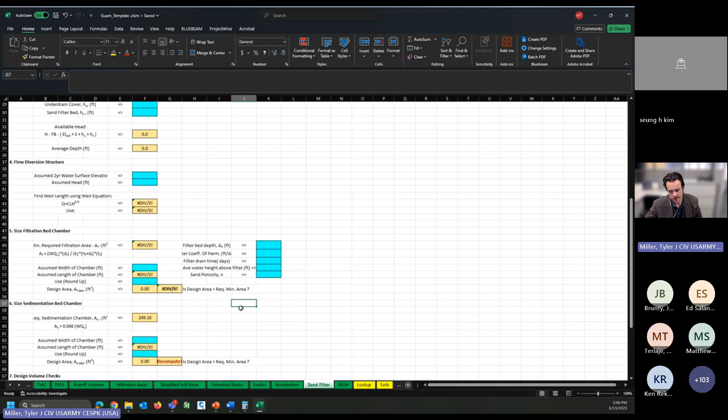I don't know if this has the same story as before, where it's here in case this niche is used, but I don't know how much. I could see it being more utilized than the bioretention option. I'm not sure what the general design community of practice utilizes. It sounds like a lot of infiltration basins.

That's about it. The Santa Barbara Urban Hydrograph - I don't know, Jessica, I don't know if this is a legacy thing. I'm unaware of what this is utilized for. I couldn't find in any of the examples utilizing this hydrograph.

Let me check if it was in a TR-55 reference. Okay, so maybe it's a different way to figure out runoff values using a different methodology. In all the examples I saw, I didn't see this tab being utilized. So I've kind of kept it there, but wasn't sure if it's a legacy sort of rendition or whatnot.

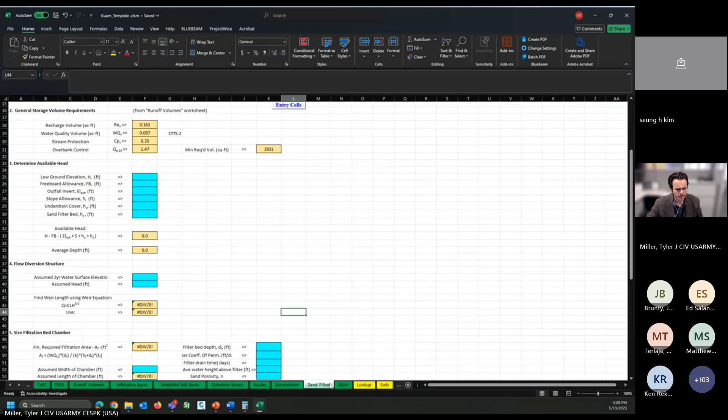That is how to use the Excel sheet. It's a lot, I understand that. And it's going to be one of those things where I think you have to use all the tools available to yourself and slowly but surely try to utilize it.

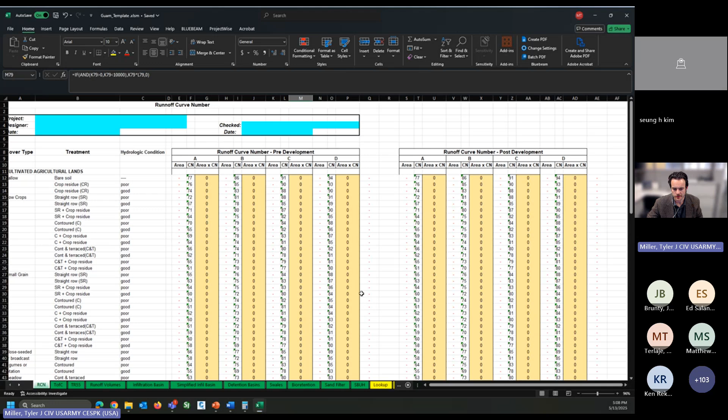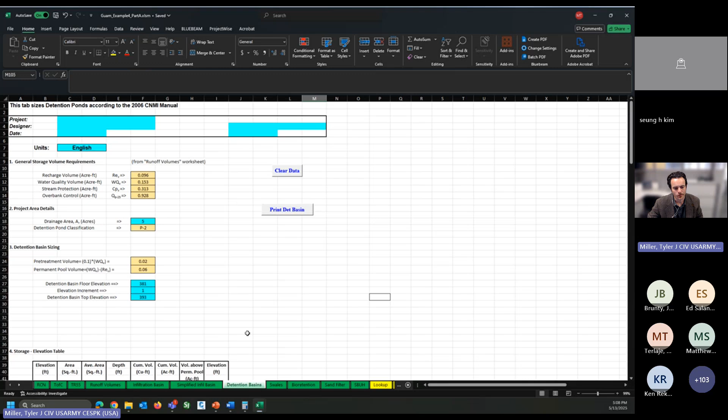So like I said before, you have your Excel sheet that was provided that's completely blank. You have Guam example part 4, or Guam example 4 part A, which comes straight out of the Guam manual that actually has these numbers and values put in, and they work correctly. They don't give you negatives and the macros aren't jacked up like I showed earlier. And with this came a Word document.

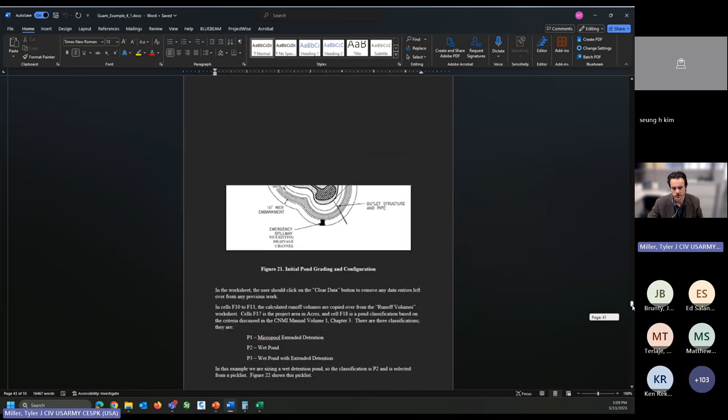And this is a huge helpful use - this is pretty much how I taught myself how to use this Excel sheet. It's 55 pages long, it's super long. But what it does is it goes through the example you're doing. It shows your dry swales, it shows your catchments, all that whatnot, tells you your values.

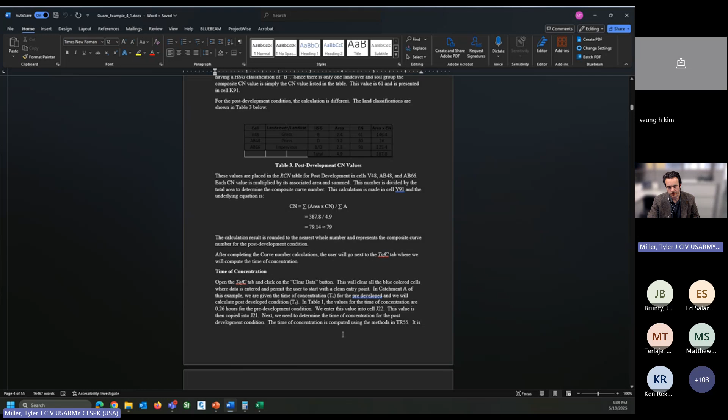And then it actually goes way more in depth than what I provided. So it'll go through and actually explain to you why some of the yellow features that are calculated, how they're calculated, why they're calculated the way they are. So this is something you use to, say you're doing your design, you look back and you're like, I'm not really sure, Tyler kind of glossed over this section - you can come through here and read more about it. So this is kind of like a really good instruction manual when you want to go really in depth. And then, like I said, I'd use the PowerPoint as your first start, and then the Word doc is the next place. And then if you still are not sure, I think the Guam manual is the last final check of sanity to use.

And I think I've gone through most. It is 5:10 over here, and I am getting foggy. So if I'm missing things and people are confused, please, this is the time to speak up.

Yeah, Tyler, thank you so much. This has been really great. I think it shows a lot of potential, how to get ourselves streamlined out here, using an effective tool that basically can be used by designers and verified with our regulatory permit divisions at Gov Guam.

So I know there's been a lot of information to absorb, but yes, let's open this up for some good questions and comments - things maybe you think we should look at, ways to possibly improve it. The floor is yours, guys. Let's take this opportunity.

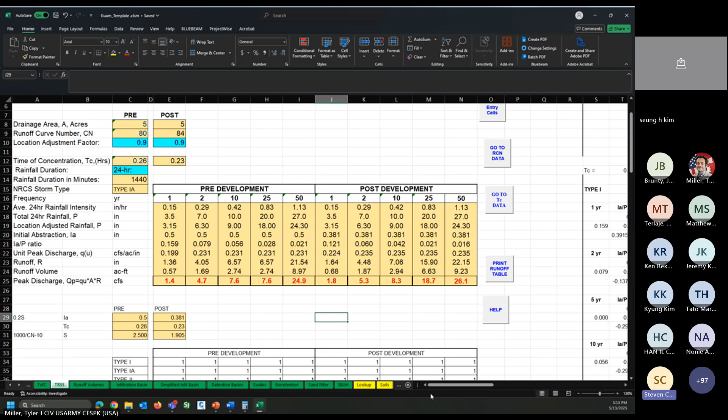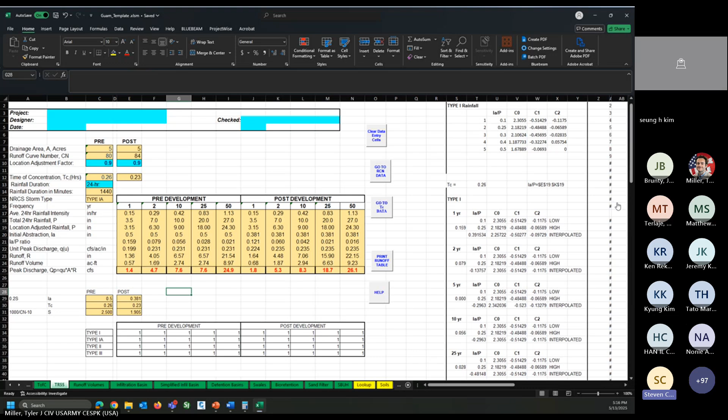One thing I may suggest is if Guam EPA could probably review this or make note of which items they usually provide comments and feedback to applicants on, what they're going to put a permit application on hold for, a trend of if they notice maybe people aren't following certain requirements of the stormwater manual. And then how we have notes on the side - check that this is greater than this or this is less than that. Maybe it could be in this spreadsheet, recheck this value to make sure it complies with the stormwater manual, if that makes sense. The intent is to make sure all the applicants for permits are following the stormwater manual. So if GEPA knows that people usually aren't complying with certain requirements, maybe the water quality volume or certain requirements, that it could be flagged to contractors when they use this Excel spreadsheet.

Yeah, that's a great point, Steven. I already wrote it down.

Yeah, and then one other comment I could suggest - these are the four main calculations, and one other calculation that Guam EPA requires is for temporary storage. So it's a pretty straightforward calculation, but maybe if there's a summary page on the requirement based on your project size and how much temporary storage you need, if that could be one of the printouts also.

That's another good idea. Do we have anyone from Guam EPA and DPW on? I'd like to hear from them - we have some good suggestions here from Steven. Yes, we noted that, thank you so much for those comments. Okay.

Maricar, just so you know, not to put you guys on the spot, but how do you guys feel about the tool the second time around? Do you feel like you could get some potential use out of it and possibly improve the process? I think so, because, you know, from this time we're really short of resources, I think this one will be helpful to us to make our review a little bit faster. Thank you so much.

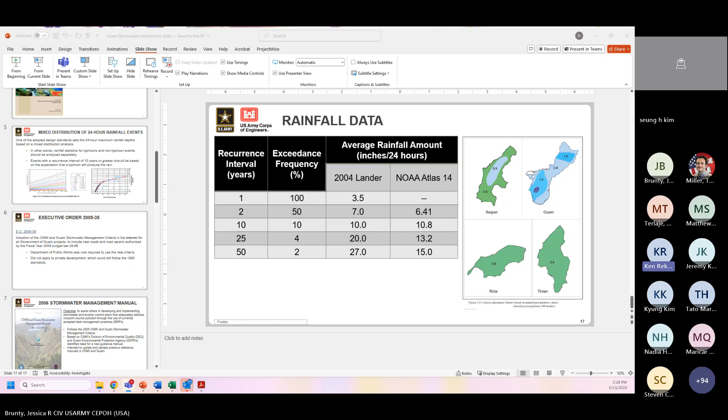But we do see it. I agree, we have seen it. I think Ting Ting and recent storms have proven Lander to be right, so I'm not going to argue that. That's a really good point you bring up, though.

That one is very interesting too, what you're talking about, like the intensity we receive in a very short amount of time, and that does dissipate, right, probably as fast as it came down. But yeah, that is an interesting point to look at. See how we can find a happy medium on that for our design standards.

Yeah, and again, it's probably... go ahead. I was just going to say, I'm wondering if it's something as simple as, like we saw in the infiltration basin tab, there was an analysis question you had to answer about basically risk.

It almost sounds like that, you know, my Army Corps brain's going off right now. There's a lot of things we do where there's multiple iterative processes of what's the risk of this structure failing, and based off that answer, the requirements are vastly different. It sounds like that's what I'm hearing, that there needs to be some sort of requirement set forth.

Yeah, that could be an interesting way to look at it, because your larger stormwater systems, like culverts and things where there's high development, the higher risk, you certainly want to make sure you're protecting there. But when you got sort of low impact, smaller commercial locations doing larger catchment basins and stormwater storage basins, maybe the risk is lower. Maybe we can shift over to a lower risk approach. But yeah, again, more discussion on that's needed.